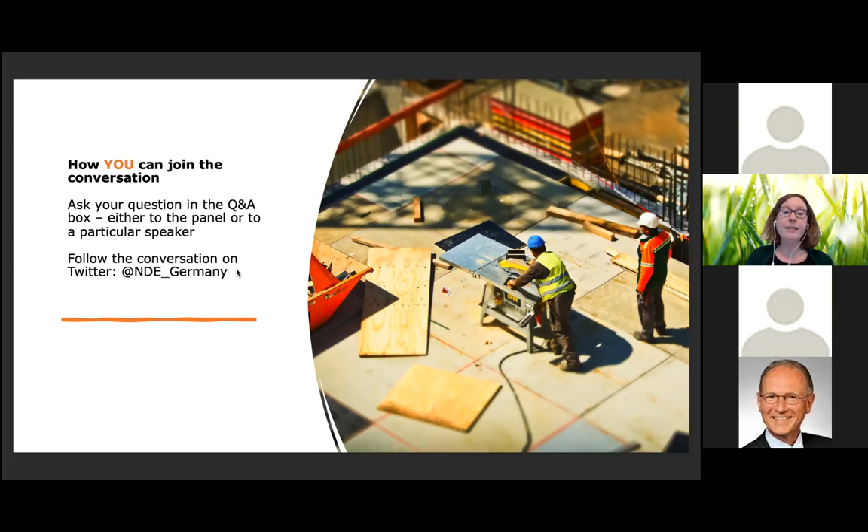Let's have a quick look back at last week's webinar, where we had speakers from GBPN, University of Stuttgart, Wuppertal Institute, and the Environmental Ministry of Finland joining us. It was discussed, as mentioned before, about embodied carbon. The buildings and construction industry is responsible for nearly 40% of global emissions in 2019, of which 25% are embedded emissions and 10% are global energy-related emissions. The sector also generates, for example, 55% of total waste in Germany. About 20 countries, as we've learned last week, have already established clear requirements for the calculation of embedded emissions for the approval of new buildings and also as requirements for public procurement standards.

Vietnam, for example, which was presented, has a fast-growing construction sector and is undergoing a switch from traditional energy-intensive fired clay bricks to sustainable alternatives such as autoclaved aerated concrete, AAC, foam concrete, and concrete brick blocks, CDB. We also discussed using wood as an alternative material, which has significant advantages such as energy savings and improved recirculation, but of course the sustainable supply of wood is crucial. Finland, which was also presented, is considering the entire life cycle of buildings in its regulations, including the carbon footprint and carbon handprint by making use of a national carbon data set.

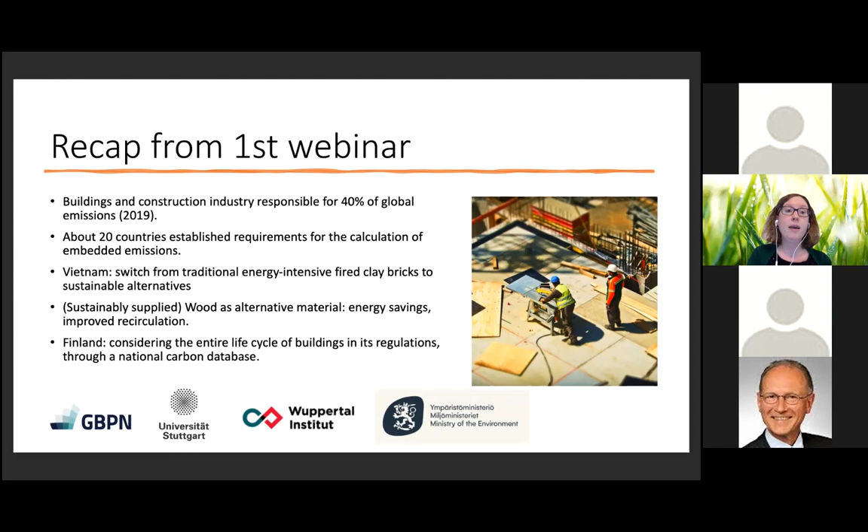Now we are looking forward to continue talking about this exciting topic with our panel today, which consists of Michael Büchel from the BMW, Matthias Mendonca Oliveira from the IDDI Initiative, Matthias Tietze from C3, Matthias Höppner from Holcim, Jan Skocek from Heidelberg Cement, and Franc Kamugisha from Ecoplastile. Thank you to our speakers for joining us today, and we will start with a brief introduction by Michael Büchel from BMW. You have the floor.

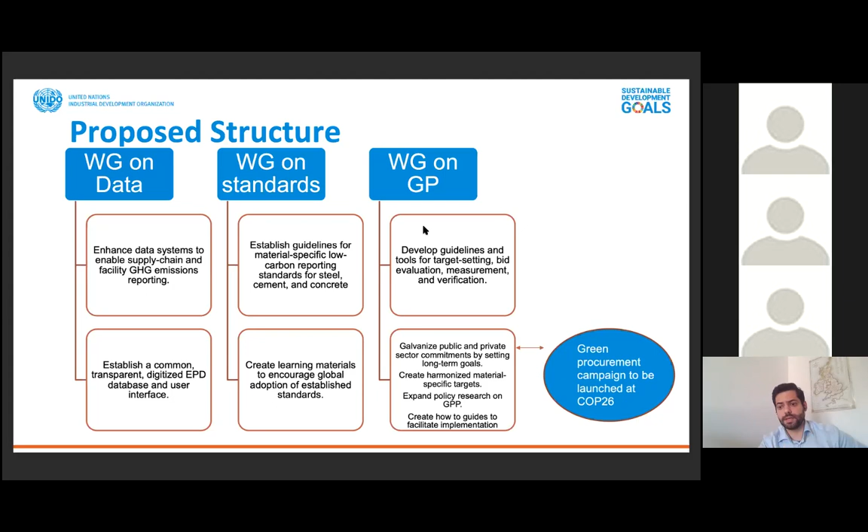So this will be launched, all these 3 working groups will be launched at COP26, but bear in mind that we'll also want to launch a green procurement campaign at COP26 to bring in other governments and companies wanting to make commitments on their procurement of low carbon versions of these materials. So these are the 3 main outputs plus the campaign.

I will quickly talk about the timeline for this year. We launched the initiative on the 1st of June, but we will have discussions with the private sector as well, the global private sector, on what they can do with their procurement, and how they can fit into the initiative and apply similar procurement models that will be discussed among the governments. We are initially thinking of a roundtable at the end of August, beginning of September.

This slide is a bit out of date here. We will discuss with them what is in the realm of the possible for COP26, and we will have a CEO Ministerial happening in October.

We'll design the initiative and a potential common target for procurement in the months of August to September. There is an example of a target there, but it could be something else. We're just looking for feedback from stakeholders on this, but essentially trying to see what kind of embodied carbon reduction we can achieve by 2030 of our procurement.

And then we will have some research being done, some policy briefs that will be publicized in August, September, and October. And of course, we will work to increase the membership of the initiative itself.

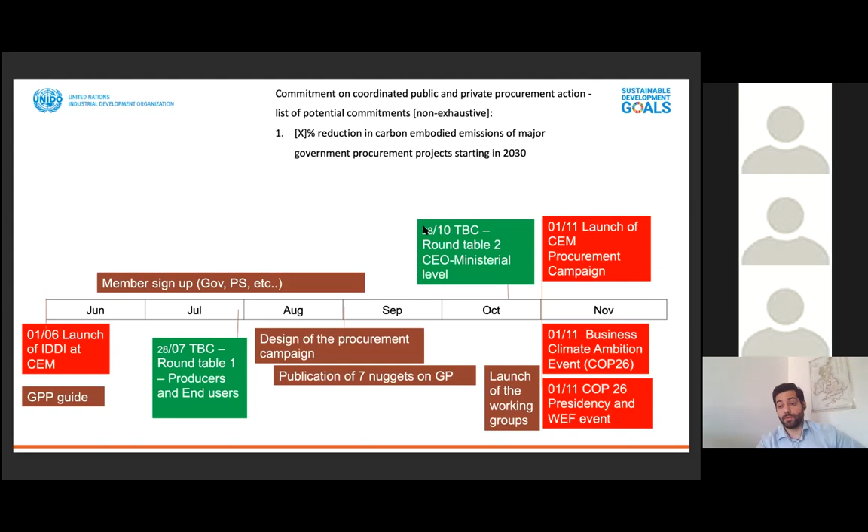So this is a very quick summary of what is happening in terms of the IDDI, and I just put a slide there with the main contact points. So you have UNIDO, you have Rana, who is the lead contact for the initiative from the UN side. You can, of course, contact me if you're interested to know more about the initiative. I'm really glad to be working on this with other governments, and I'm happy to see all the engagement that came from them on this.

Important to note that this needs to be balanced between developing countries and developed countries. That's why it's so good to see India so actively involved in this work. We also have a website that I can share with you, where you can find more information and how to contact us. Thank you.

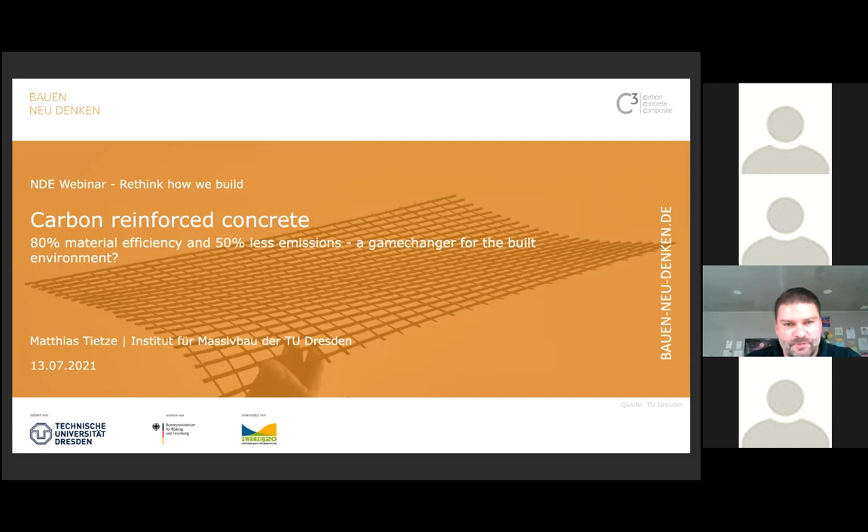What is the motivation to build with a new material combination in the building sector? We think there are a lot of future challenges, and I have 4 of them on this slide. I will start with the left picture: urbanization. This is a problem - the world population is growing, especially in the cities. We need a construction material to save space, because by 2050, 6.5 billion people will live in cities.

The second point is steel corrosion. The most used material in the building sector is steel reinforced concrete, but the steel in this construction method could corrode, and the construction does not reach the lifespan we expected.

The third point is resource consumption - the building sector is responsible for up to 50% of the worldwide resource consumption. And also the last point, CO2 pollution: cement production alone is responsible for 6% of the worldwide CO2 pollution.

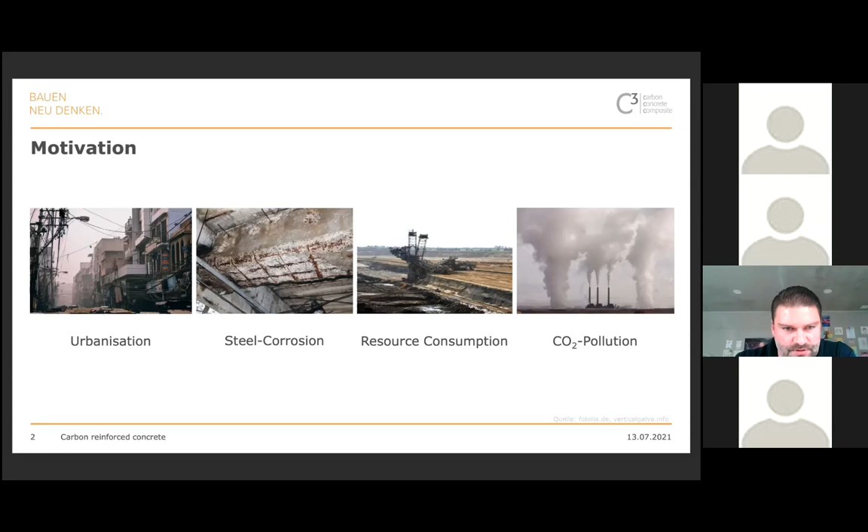So if we think about resources and climate change, we have to think also about the building sector. We think we don't have the solution, but we think we have a solution for the future challenges.

This could be carbon reinforced concrete, because it has essential advantages. First, you could construct very slim, and so you have a lot of usable space in your building. Second, carbon fibers as a reinforcement are chemically inert, meaning they do not corrode. Third is resource efficiency.

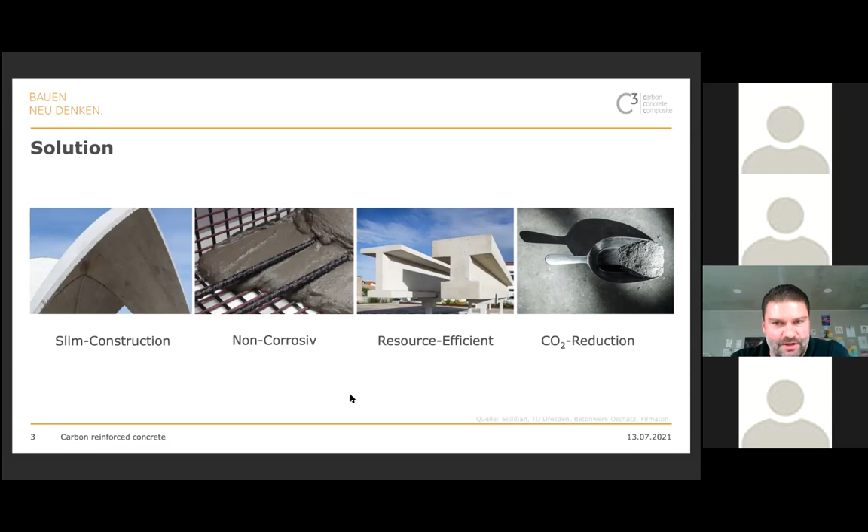We say that carbon concrete, or carbon reinforced concrete, could be a mega trend for the building sector in the 21st century, because you could use this material combination in, I think, every part of the building sector - for example, tunnels, bridges, sandwich constructions and facade elements, residential buildings, precast elements, and also curved constructions. I think it's very interesting for architects.

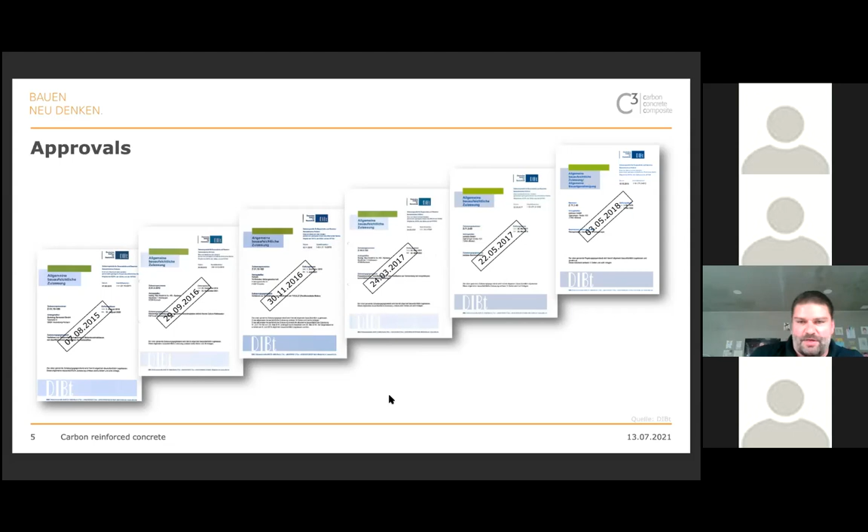But I think it's not a vision, not an idea for the future. We think we are now in the market with some applications. We have a lot of national technical approvals - for example, a limitation for crack width, a strengthening system, a system for facade elements, sandwich elements, and also a precast parking garage system. So I think we are starting into the market now.

So I would like to give you a short overview about the carbon material, where it came from. What you see is an overview of the production process. We start with a PAN precursor - the raw material for that is crude oil. That's not so good, but maybe in the future it could be lignin or bio oil. So we start with this PAN precursor.

You see it in this glass bottle, this white fiber, and then we use a process called pyrolysis - you see these glasses in the background, yellow, orange, and purple. These are the steps where we go to the carbon fiber. After that, we do a sizing process with this fiber, and then you get this fiber spool on the right side, for different applications in aircraft, building sector, automotive, and whatever you want.

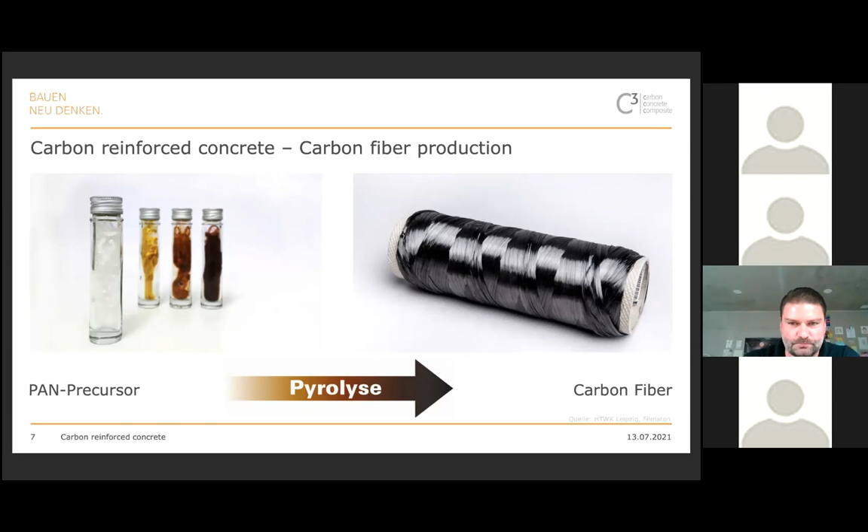What you see is the development of the volume and the price. We start in the 1970s with a very high price. It was only used in space and military, but now the price is decreasing, and we are down to 15 euros per kilogram, which is now very interesting for the building sector.

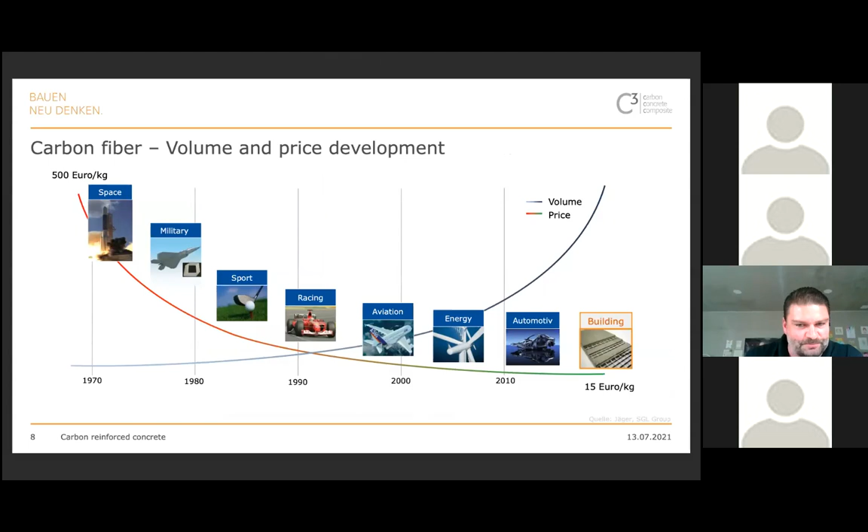Experts familiar with the building industry know that 15 euros per kilogram is very high compared to steel reinforcements, which are only 1 euro per kilogram. But we don't have to compare the price per kilo, we have to compare the performance. Carbon has only a quarter of the density of steel reinforcement and 6 times higher tensile strength. So you have a cost factor of 15 and a performance factor of 24. So we say carbon reinforcement and carbon fiber in the building sector is now comparable to steel.

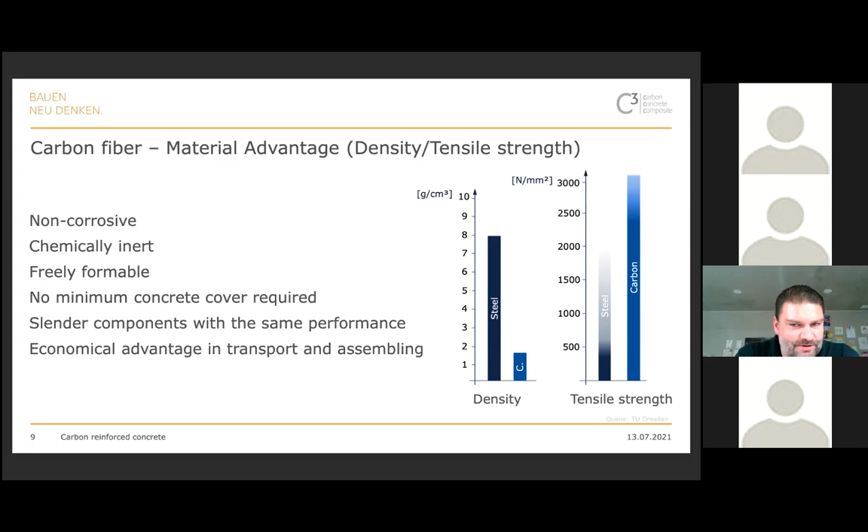The next slide shows our reinforcement types. On the left side you see the grids, which we have with different mesh widths for different applications. On the right side you see the rebars, for example for bridges and other reinforcement applications. We have different coatings for that: a styrol coating for very flexible applications, which you need in the existing building sector, or you could use epoxy for very stiff reinforcements.

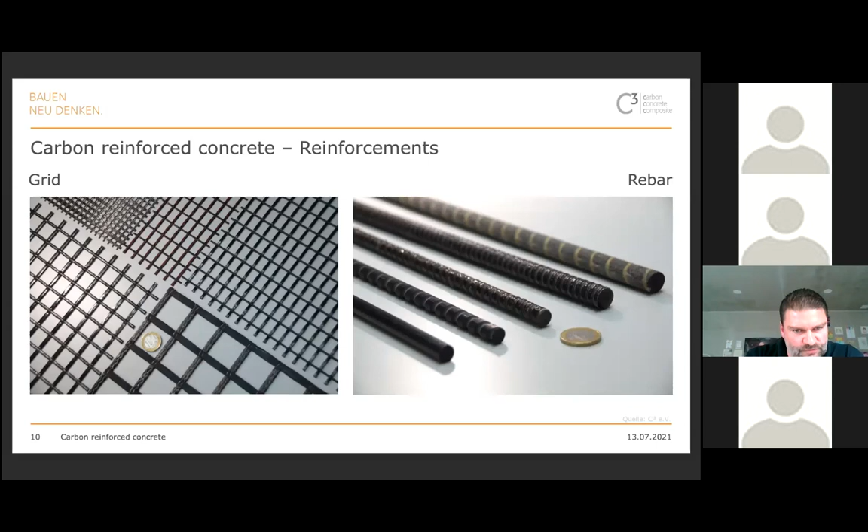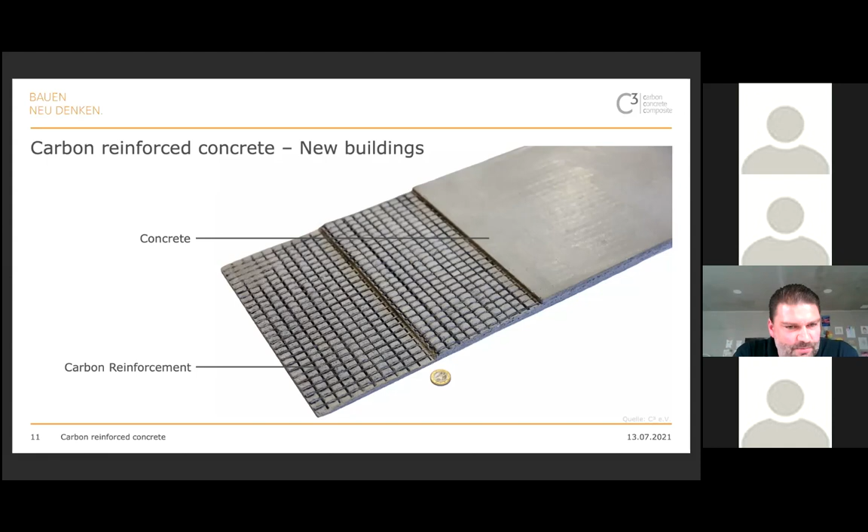We can use this material for new buildings. What you see is a very slim facade element, only 2 centimeters thick. This is also a very interesting application for existing buildings, where you can strengthen them with a very slim layer of carbon reinforced concrete.

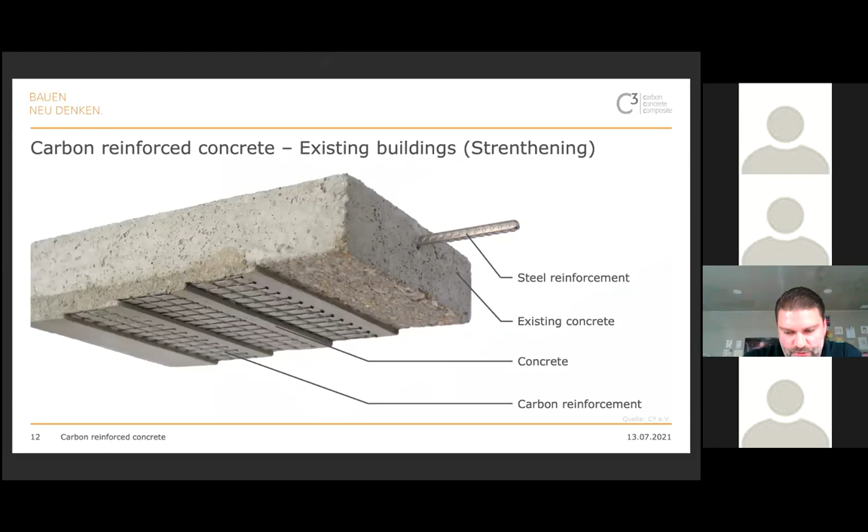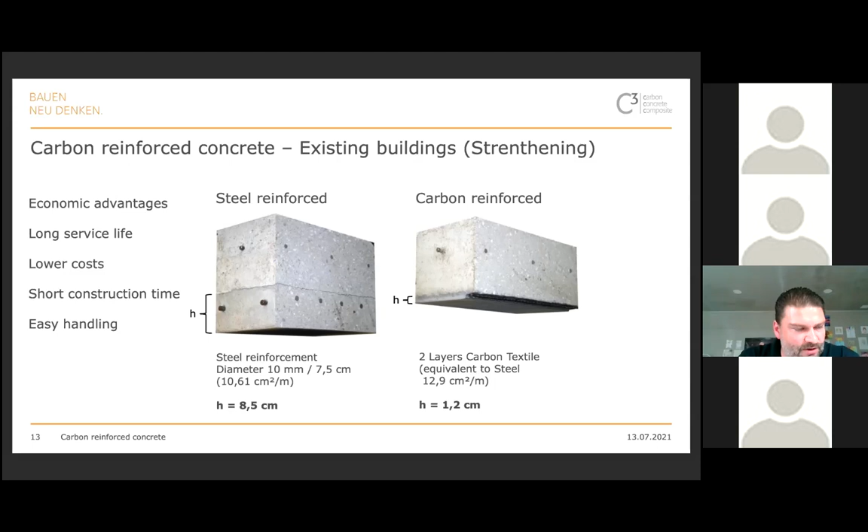So I have a short example for you. On the left side you see the application with a steel reinforced shotcrete, and on the right side a carbon reinforced shotcrete application on an existing building, on a roof for example. The steel version needs 8.5 centimeters of concrete, while the carbon reinforced fiber version needs only 1.2 centimeters with the same load capacity. So we could say we save 80% in concrete material in this case.

Now I would like to give you some information about our cube. The cube is our building that is being built in Dresden now. I'll give you short information about the wall development and the reduction of construction space. We started on the left side with a conventional precast wall, and developed this with the target of reducing construction space from 10% up to 45%.

This is the new wall we use in Dresden in the cube building. It's only 24 centimeters thick with 2 concrete layers and also a high performance insulation layer. I think this could be a good way to save resources.

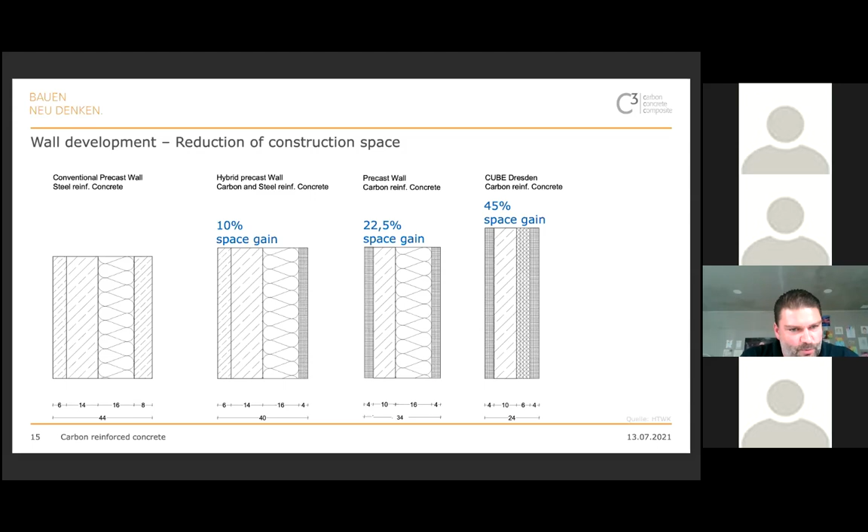One of the last slides is a visualization of our twist elements, a part of the cube building. It shows a wall element and a roof element, and all in between. It's a doubly curved shell in a multi-layer construction system with a load capacity layer, a weather layer, and also an insulation layer.

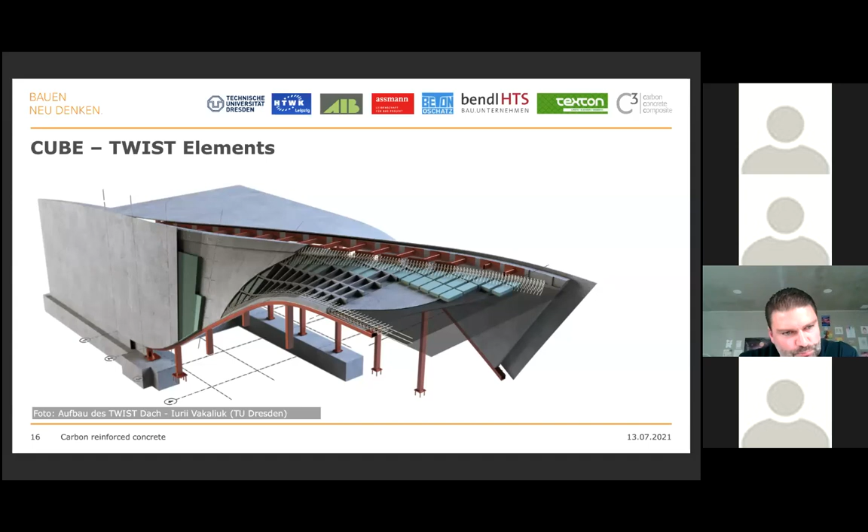We combine this and save, in this combination, up to 35 to 50% of concrete material. My last slide is also a visualization from the cube building, which will maybe be finished in March 2022 in Dresden at the campus of TU Dresden.

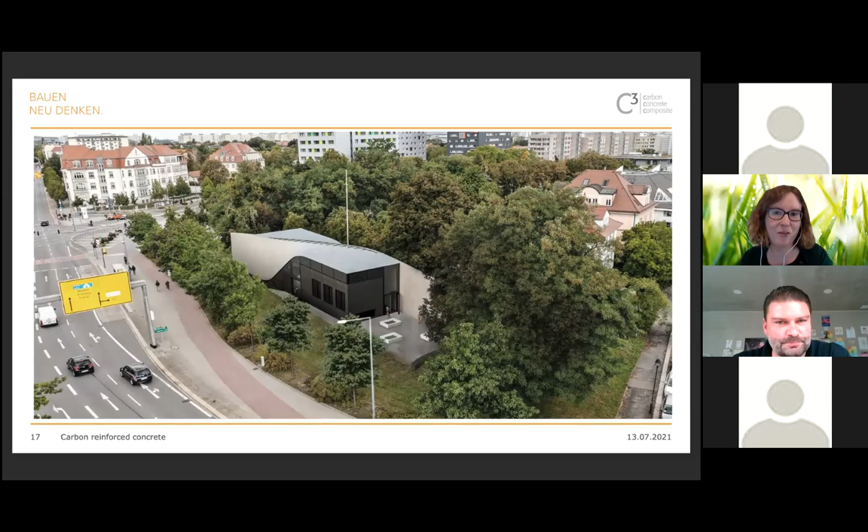Thank you very much, Matthias, for showing already, also for bringing the implementation example for the material. I think that's quite exciting to see that TU Dresden is going to be in an innovative building quite soon, at least parts of it. So thank you for that. Did our audience ask any questions, Sonja? No questions at the moment. I'm sure they are waiting eagerly for the panel discussion.

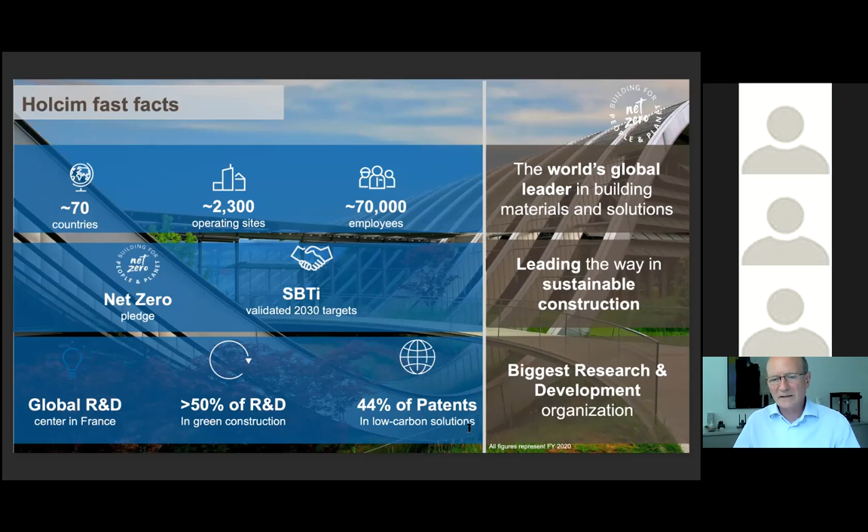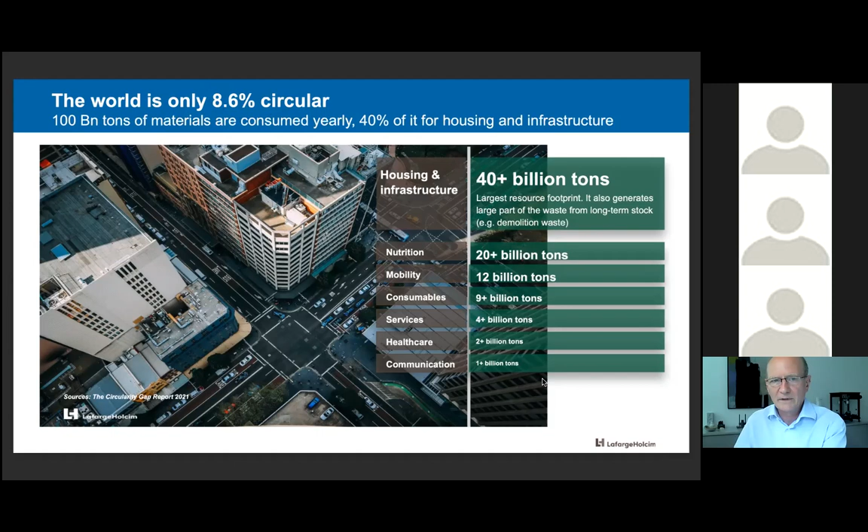So some basic figures about what we are talking about: about 100 billion tons of materials are consumed yearly, and about 40% of this material - we just heard it could also be 50% - is used for housing and infrastructure, and only 8.6% of this material is recirculated, so recycled. So we have a very big footprint with our industry in the field of consumption of materials.

Circular economy improves our resource efficiency - this is the way we should look for. This means that we reduce waste and keep materials in use. So we talk about a change in business models, which will replace the end-of-life concept with keeping materials in use. We should stop extracting, stop wasting, optimize what we have, and reuse and recycle.

As I already mentioned, only a small percentage of materials are recycled today, and this has to be improved. As we already heard today, this is also related to the consumption of materials and not only CO2 emissions. The demand is expected to double until 2060, so there's a big effort for us to change.

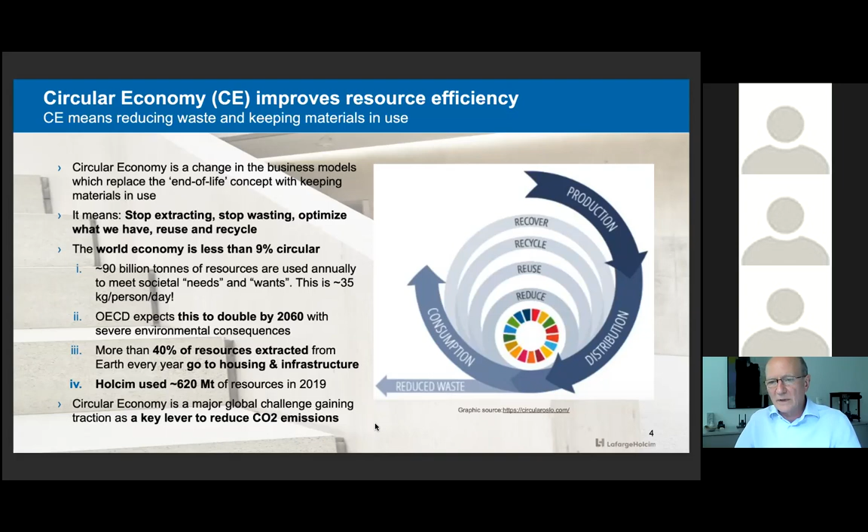Holcim is using 620 million tons of resources in 2019. Circular economy is a major global challenge, gaining traction as a key lever to reduce CO2 emissions as well. Circular economy can enable a 40% reduction of CO2 emissions also in cement, plastics, steel, and aluminum industries.

The priorities for business are that we can divert 9.5 billion tons of construction and demolition waste from landfills. We can use waste as a resource. We can phase out fossil fuels by using alternative materials, and we go for low carbon and look for low carbon alternatives.

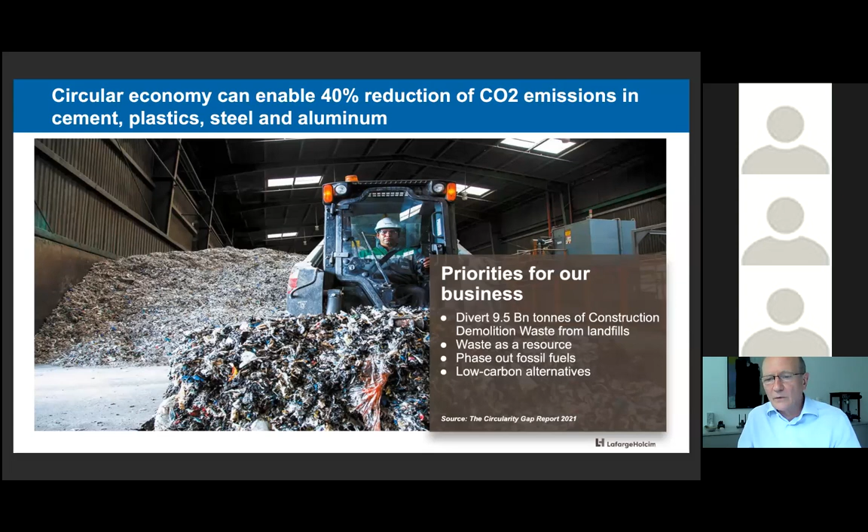Another focus - and this is also the story we heard just before - is to do more with less material by building with different designs, as we already saw with carbon concrete, and also using digital solutions like 3D printing, and market platforms which optimize the supply, and also using BIM, building information modeling, to maintain and rebuild existing constructions.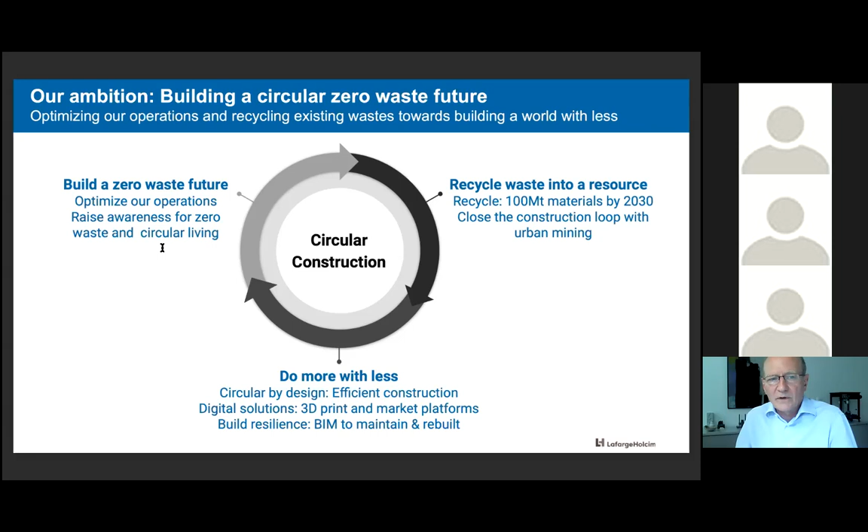So we are looking to build a zero waste future and to optimize our operations, raise awareness for zero waste and circular living. We need to create a new ecosystem to further reduce virgin materials used and scale up value creation. This includes elements to maintain existing structures and to restore, recover and regenerate building materials from construction demolition waste at the end of their lifetime and life cycle, and preserve natural resources instead.

We have to repurpose - we will support our customers and communities in repurposing their waste. We will aim to become fossil free. This is also a big goal we have, and we would like to be a partner in this field to create an ecosystem, inviting our customers, employees, suppliers, and communities to join this approach.

So some elements from our business, which we already started. We have a project like ORIS. This is a system for operational and construction efficiency and sourcing database, and we go for reduction of CO2 emissions and resources.

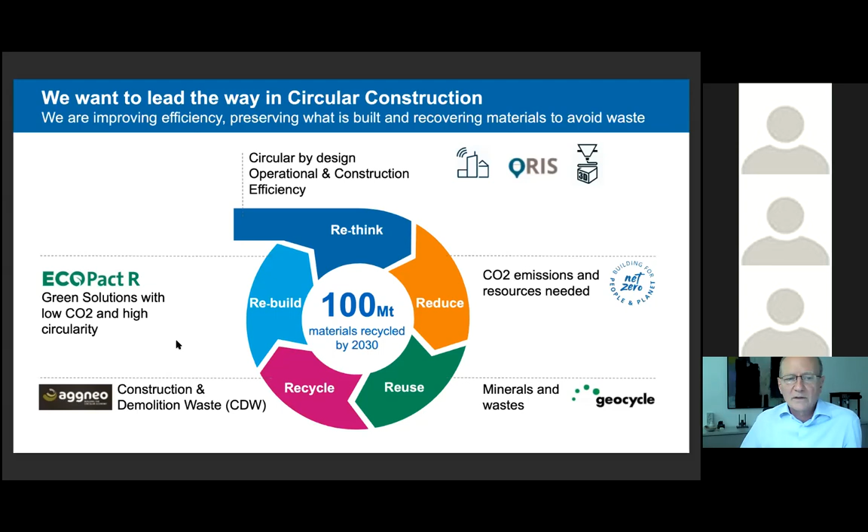And by using the recycled materials, we would also design products that incorporate recycled materials. This means also in cement production and in concrete production. I give you some examples for products we already have in the market in some countries. For example, this Holcim Susteno cement contains about 20% of recycled concrete material. This also saves about 20% of CO2 emissions, and also, of course, natural sourcing material.

And this is the first use of a cement that contains the construction and demolition material in the cement as a cement component.

And another example is the Ecopact R concrete. Ecopact is a group of concrete products that are reduced in CO2 emissions, and this one is also containing recycling material, so we can save about 45% of virgin materials and reduce the CO2 emissions by 50% maximum.

And if you also use the Ecopact Zero, we have some local offsetting for the remaining CO2 emissions related to that product. And as I already said, we are also starting in the circular aggregate business, and we'll try to save as much virgin materials as possible. We have already started in this business, and this will be the way the whole industry should go for less resource consumption in the future.

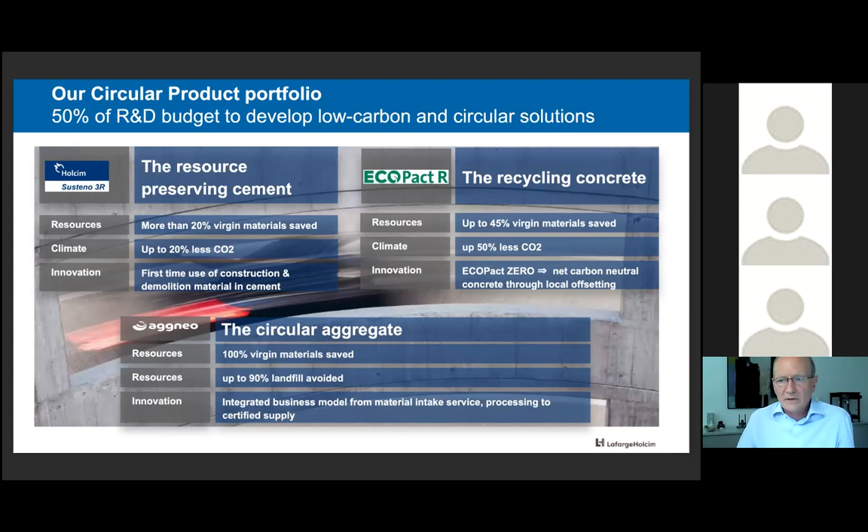So thank you. This is the end of my presentation. Thank you.

Thank you very much, Matthias, for this good overview of the circular economy concept of Holcim. That was quite interesting. Sonja, do we have questions to Matthias?

Now you should be able to hear me. Hi. Yes, we do have some questions from the audience, one directly to Matthias, referring to an earlier speaker. We have heard from Mateus Oliveira the ambition of the IDDI Initiative to promote green public procurement. Do you see green public procurement as an effective tool for low carbon markets? And what are your recommendations on green public procurement?

Yes, from my point of view, to promote green public procurement is the right way. You can see this in the Swiss market, for example. The city of Zurich started with this approach where you are only allowed to deliver ready-mix concrete if you have recycled material in it. And there are also some big cities in Germany thinking this direction.

Based on the knowledge that sometimes the recycled materials and CO2 reduced materials are higher in costs, you need higher prices, and without any direction this way, you can't get a market breakthrough, because people always look for cheap material. So I think the promotion of green public procurement would be the right way to increase the amount of more ecological building materials.

I would like to give you a short overview about one concrete example of how recycling and reduction of CO2 emissions can be joined together, because this is not as obvious as it seems, since recycling normally involves much more processing steps, more logistics, and the waste streams are much more scattered than the centralized production of virgin aggregates, cement, or concrete. So the CO2 saving by recycling is not as obvious as it might seem at first sight.

As also partly commented by my preceding speakers, concrete, especially cement, is responsible for a significant amount of CO2 emissions, some 6 to 8% worldwide depending how it's accounted. The biggest challenge is the part of emissions coming from clinker production, from limestone, because limestone is the raw material used to provide the calcium oxide, the reactive component of clinker in cement, and there is no alternative to calcium carbonate. As a result, for every ton of clinker we produce, we emit half a ton of CO2 emissions, and there is no substitute for this.

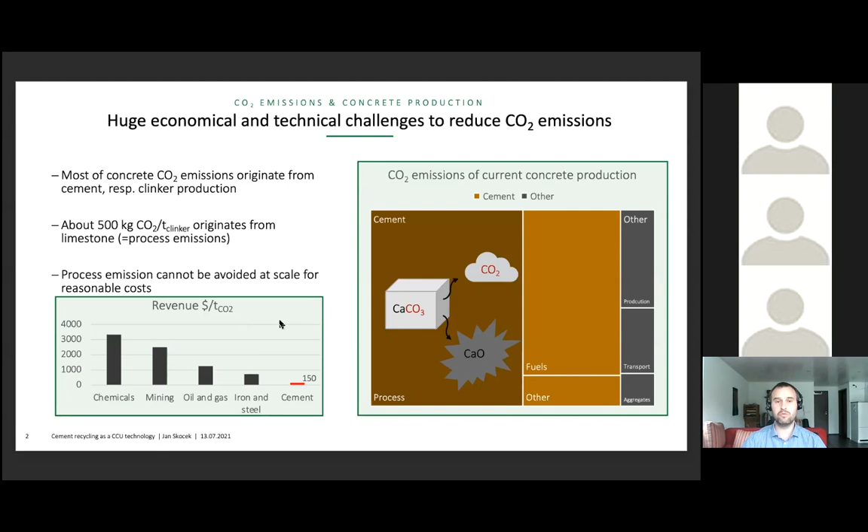There is also an important financial aspect, because if we compare the revenues of different sectors per ton of CO2 emitted, cement and concrete industry is in a really bad position, since the material is comparatively cheap compared to steel or chemicals, as mentioned previously — several orders of magnitude difference. So cement production is very sensitive to CO2 price, and we need to look for abatement measures that are cheap.

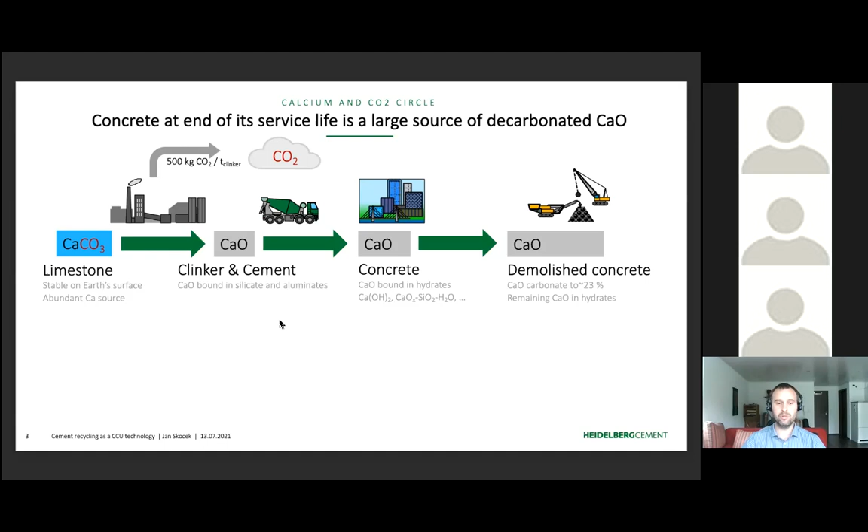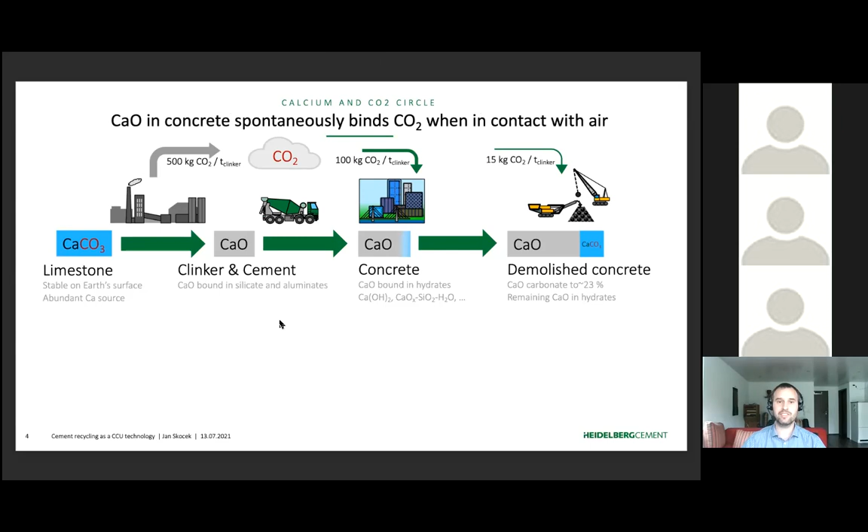But contrary to other products, we have one big advantage: the main product of clinker production, the calcium oxide, doesn't disappear. It stays in the concrete for the entire service life and even during demolition. It carbonates naturally, binding some CO2 back, as calcium carbonate is the stable form of calcium oxide. But still, even after decades of service life, most of the calcium oxide provided via cement to the concrete is still there as a non-carbonated material.

In our project, we are trying to recover this calcium oxide and reuse it, recycling it back into the production of clinker, cement, and concrete. To do that, we need several technological steps. The first is what we call selective separation, a kind of advanced concrete recycling whose aim is to split old demolished concrete into its original constituents — recycled aggregates and sand. What is left is the fine fraction, which we call recycled concrete paste, RCP, where the hydrates are concentrated, along with the calcium oxide.

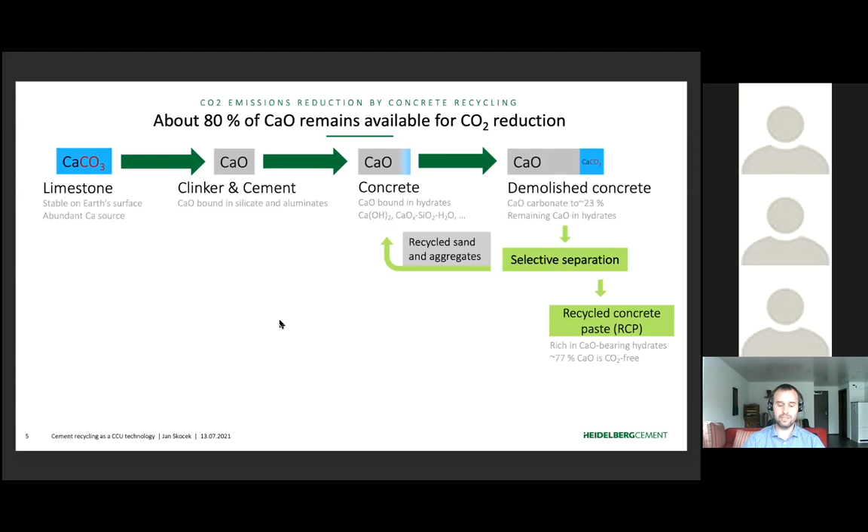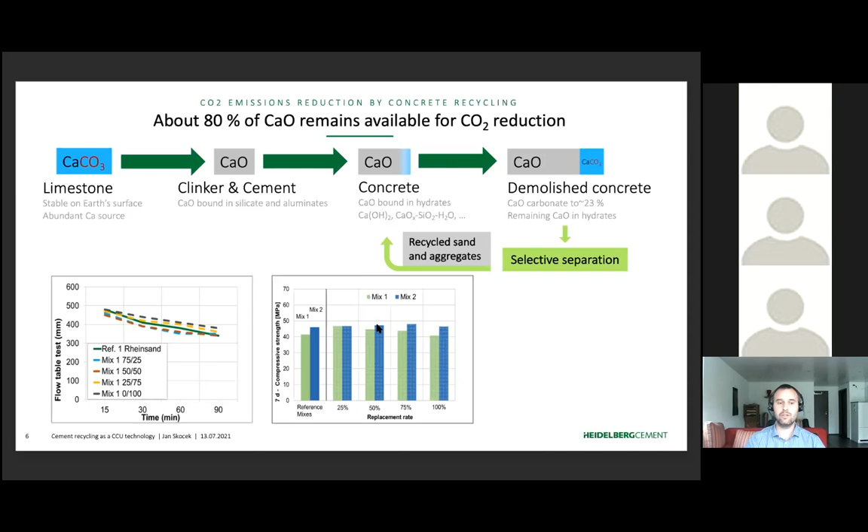And this is not just for some low-grade concrete — it is valid for conventional structural concrete with 40-50 megapascal compressive strength. This is also done without any adjustments to the mix design of the concrete, so one does not need more cement or more admixtures. This is a simple one-to-one replacement of virgin materials by recycled materials, which is the key contribution to circularity and the preservation of natural resources.

But the main CO2 saving is realized by the remaining fraction, the recycled concrete paste. As mentioned, this is rich in calcium oxide and almost free of CO2, so we can use it to replace limestone in the burning process of clinker, which directly reduces CO2 emissions since we don't need to decompose as much limestone into calcium oxide. But that's not the end of the story — there is an even more effective way to use this calcium oxide rich material, in a technology we call enforced carbonation, which we developed. Here we utilize the fact that calcium oxide reacts with CO2.

But now we are not carbonating a big piece of concrete structure, a thick wall, but a very fine powder. And we are not carbonating with the CO2 concentration as in the atmosphere, 0.04%, but some 15 to 20%, which is the CO2 concentration in the kiln gases from clinker production.

This carbonation reaction happens very quickly, and with technologically feasible time, we can fully carbonate this RCP, fully binding the original process emission from limestone decomposition. So in fact, this is a carbon capture technology based on recycled material.

And that's not the end of the story, because there is not only calcium oxide in the cement hydrates, but also silica and alumina. These two components get activated by the carbonation and turn into a reactive material which can be used for cement production.

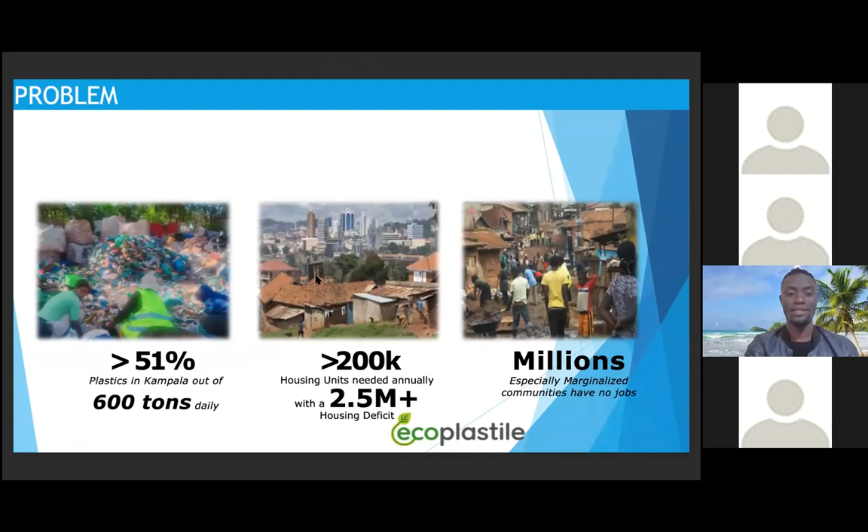Oh, thank you so much. No. Sorry. Okay, great. Sorry for this. Okay, great. Fantastic. Sorry, oh my God. Can you move to the slide back, the back slide? Great, fantastic. Thank you. Yeah, sure.

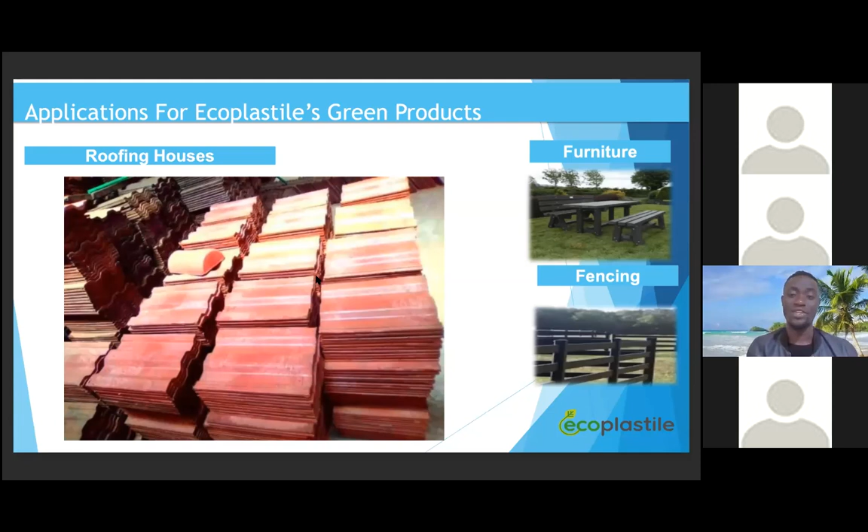And the plastic lumbers are used for furniture as well as fencing.

Our 3-year strategic plan is to, environmentally, withdraw over 5 million metric tons of waste from the environment and eliminate over 12.25 million kilograms of CO2 emissions. How does this come? For every ton of plastic we withdraw from the environment, we are able to save an equivalent of 2.5 kilograms of CO2 emissions. This is a huge saving to the environment.

And through using our roofing tiles, we estimate we'll be able to save an equivalent of 600 hectares of forest land by replacing other conventional roofing tiles on the market with our own.

But also socially, because we are a social enterprise and we look at working especially with marginalized communities, we aim at creating 2,000 jobs, especially for marginalized youth and women across the plastic value chain, from those who collect plastic to sorting to our factory processing, and then sales, distribution, and roofing itself. This value chain aims to create over 2,000 jobs, and along the way will increase their earnings from $1 to $6 per day.

The other interesting bit of Ecoplastile is that we recently launched WasteInsure, a digital platform that allows anyone anywhere in Kampala to exchange plastic waste for insurance cover.

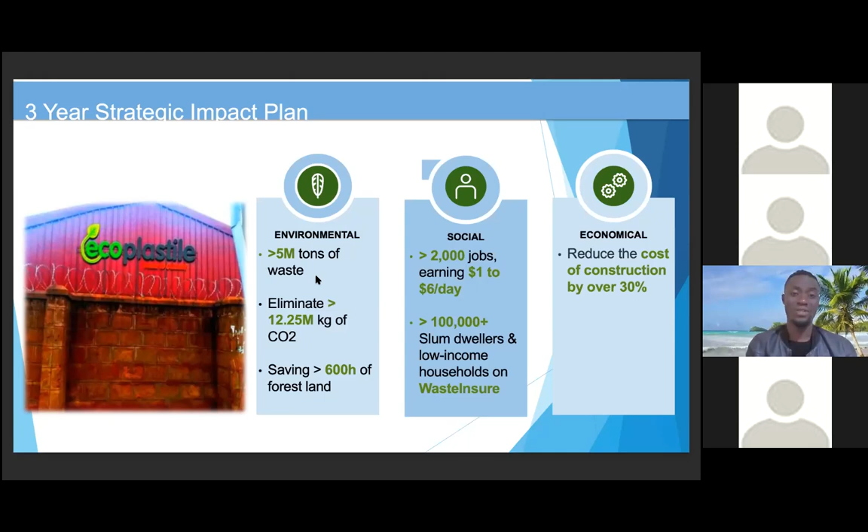I just want to end with a quote: small acts guided by the UN global goals, when multiplied by millions of people, can transform this world. Think impact and be part of this solution. Thank you so much. I welcome any questions if you have them.